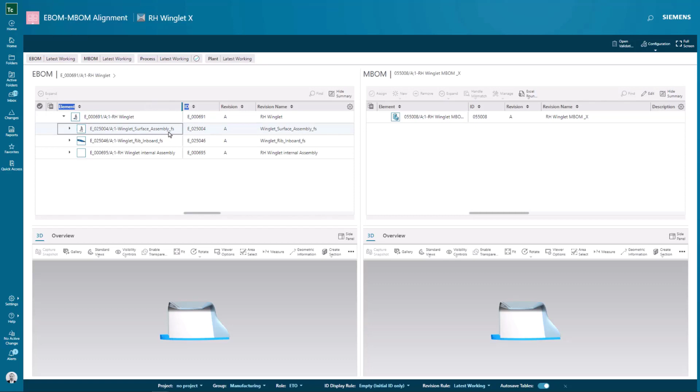Here we have our EBOM on the left and our MBOM on the right. We're going to start off by first selecting the three objects under the top node of the EBOM, then selecting the top node of the MBOM. From there, if we click Assign, you can see that our three objects underneath the EBOM side of the winglet are now underneath the assembly on the MBOM side.

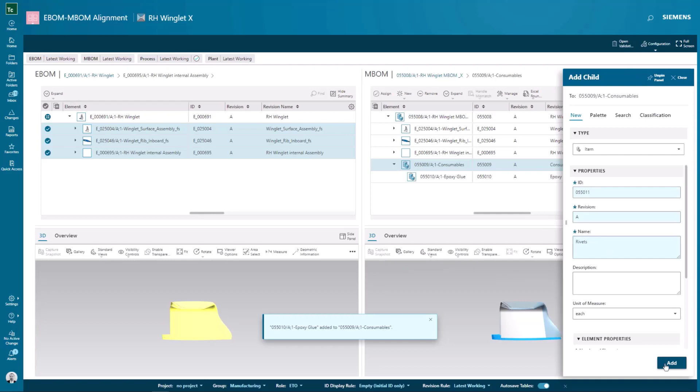Next, let's add a manufacturing element. Here we're going to add consumables: epoxy glue, and lastly some rivets. As you can see, there's maintained traceability between the EBOM and the MBOM with the ability to add manufacturing components.

Now that simple example is great and all, but I think we can do a bit better. Let's make this a bit more complex. Let's throw in some engineering change notices and manufacturing change notices to really see what EasyPlan is capable of.

Here, we start off by going into the inbox to see we have a new engineering change notice. Opening the notice, you can see that we have a description for the change on the left and the affected objects listed in the change summary table.

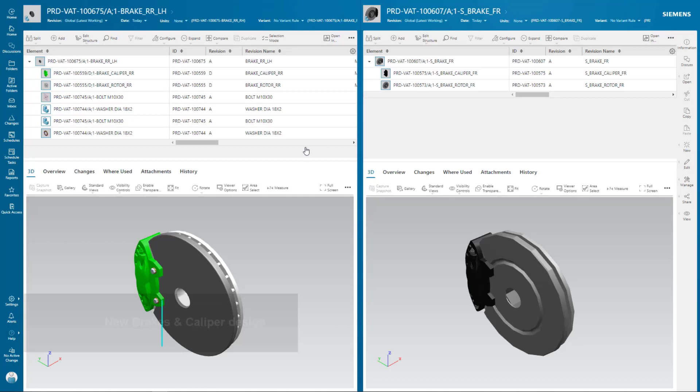By opening the object at the top of the table, we are brought to a screen showing the affected objects that have been updated in a side-by-side EBOM-MBOM view.

Moving back to the change notice, let's take a look at how this affects the manufacturing side of things. To do this, select the icon on the right-hand toolbar, bringing up the manufacturing impact page for the specific change notice. Here we see that a manufacturing change notice has not been created yet, so let's create one.

Now that we've selected the object shown and clicked Open, this shows us our EBOM-MBOM alignment view, showing our affected items in the full assembly.

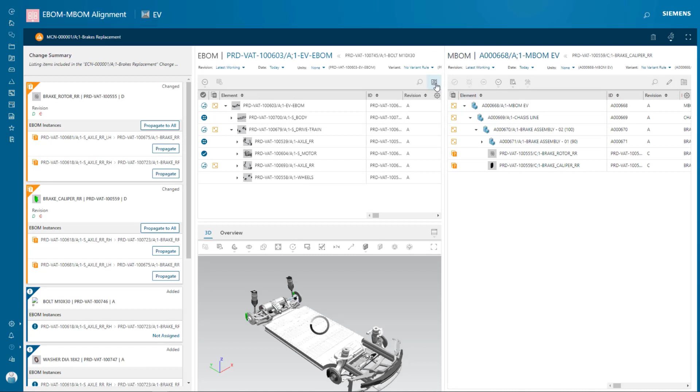With the change summary shown side by side with the EBOM and MBOM alignment page, we can easily see what is being changed and how it affects the two BOMs. These changes are able to be viewed in a tree form, as well as interactively in a 3D view of the geometry.

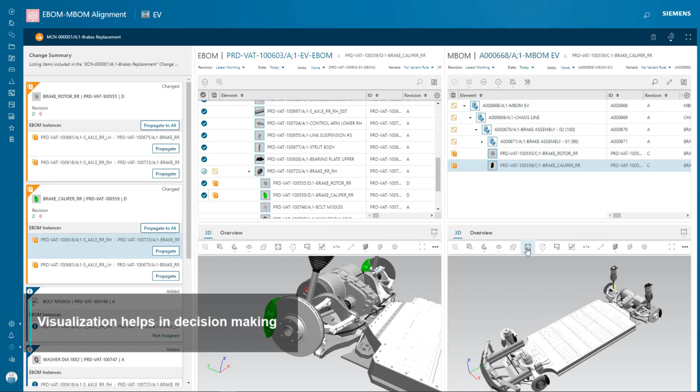From here, we can revise an affected MBOM object, and look at that - the software was able to do the work for us. Given the fact that these two objects have a live connection, the data seamlessly passes from the EBOM to the MBOM, allowing us to perform the change with the click of the mouse.

Looking back at the change summary on the left, the process is sped up further by allowing us to perform the revise and change by either propagating said changes individually or by propagating them all at once.

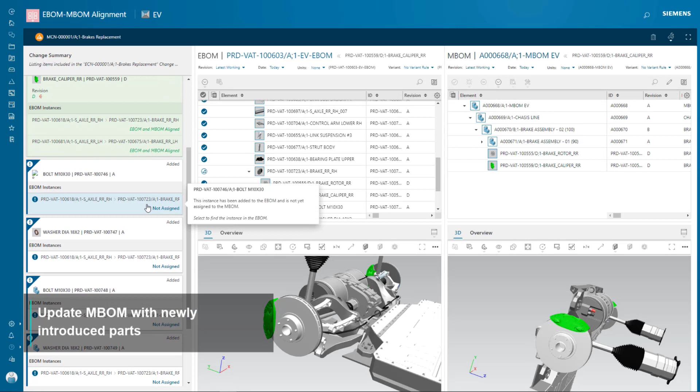Lastly, let's add those new EBOM items from before into the MBOM. Here we can click on the new items in the change summary on the left, which highlights them in the EBOM structure. From there, we select the MBOM assembly on the right where we would like to place the new items and simply click Assign. Just like that, the process is complete.

Let's now move on to our third topic: build process. EasyPlan provides a solution to define and manage the build process to improve quality while accelerating NPI by validating process plans much earlier. This eliminates costly and late design changes.

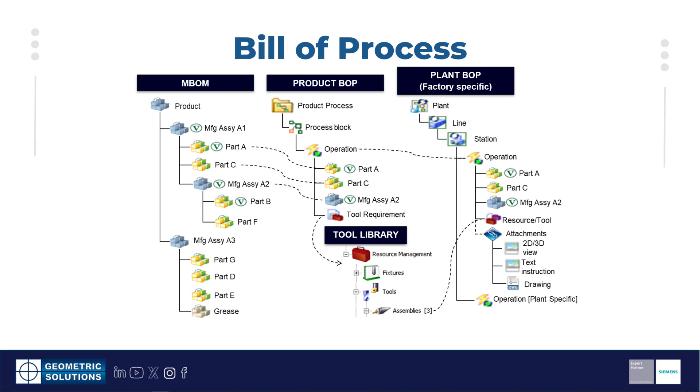The ability to reuse standardized best practices and adjust them based on plant level requirements leads to significant cost savings and productivity improvements as well. For centralized manufacturing planning, this approach overcomes the limitation of working with a subset of programs and product configurations. In this manner, any program can be adapted to reflect actual production scenarios.

We are now going to create a build process using an existing template. First, we're going to navigate to My Favorites, then open our pre-created Dune Buggy work package. As you can see, the EBOM, MBOM, and plant fields are all pre-filled as this is an existing product inside of Active Workspace. Now we're going to click the plant BOP and click Build from Template.

In here, we'll type in template to search for existing templates. Now we're going to select the automotive planning template, and then from there we're going to give it a unique name. After we give it a unique name, we will select Add Plant BOP.

From here, we're going to click High Level Planning. In this view, we can see on the right our BOP with the pre-created template. In the BOP, you can see there are different nodes for different steps in the manufacturing process: first the body in white, then the powertrain, then the final assembly.

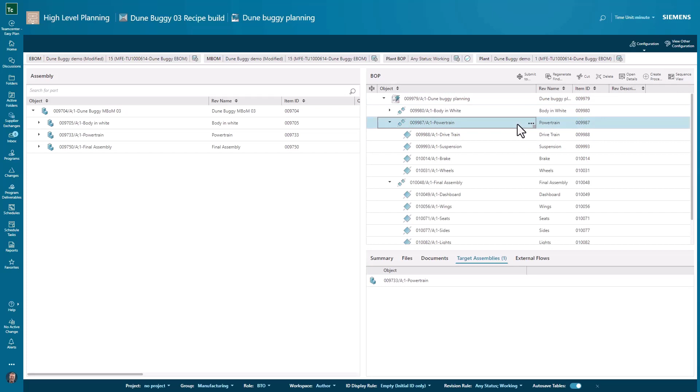Going back to the tree view, let's dive a bit deeper by selecting the powertrain node. By clicking Sequence View again, you'll see we now have a more granular view of step 4, powertrain, starting with drivetrain and ending with wheels. You'll see there's a green and red icon denoting the flow of this manufacturing step from start to finish, meaning that until we've reached the red icon and completed the wheels, we're unable to move on to the final assembly phase of the manufacturing process.

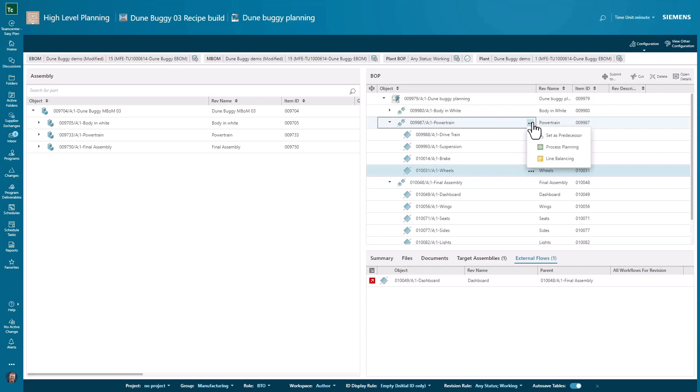Now let's dive a bit deeper. Let's click Powertrain, the ellipses next to it, and click Process Planning. In the Process Planning view, we have our powertrain assembly that we attached earlier on the left, and on the far right, we have the assembly's 3D geometry. In the middle, we have our process, where we can see the stations where each of the manufacturing steps will take place.

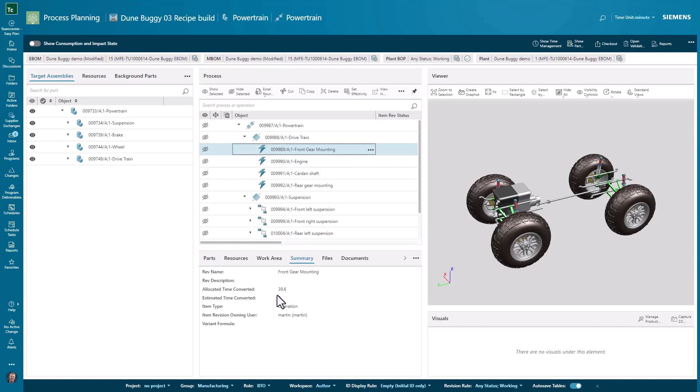Now, if we select the front gear mounting node and click the Summary tab at the bottom, we see that the time allocated for this step is recorded here. This ability to assign allocated time for completion of each step allows us to compare the actual recorded time it takes to complete the step, and adjust the manufacturing process in order to increase manufacturing efficiency.

Before I open the floor for questions, I'd like to go over a customer success story involving the use of EasyPlan.

Aurobay, with a heritage from both Volvo Cars and Geely, develops and produces world-class powertrain solutions for a global market. The challenge they faced was that they needed to replace their current Volvo-owned production systems with a modern and powerful alternative, which in this case was Teamcenter's EasyPlan solution.

Using the EasyPlan solution, Aurobay is able to manage data from internal sources as well as incorporate external customer data. For both their manual and automated processes, Aurobay is able to rely on the EasyPlan solution to get the job done.